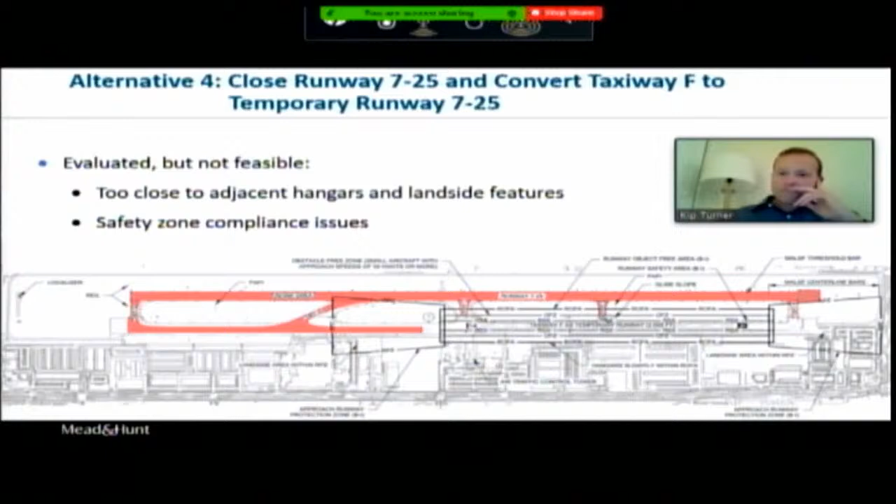Is someone blocking on communication? Okay, should I try to see if they can hear? Kip and Mr. Chairman, can you hear me now or not yet? Still can't hear. Can you guys hear us now? Yes. Yes. Yes. Okay, back on.

Thank you, this is Anna. To respond to your question, Mr. Chairman, we do try to keep our practices consistent with the Board of Supervisors, and a standard procedure they do on receive and file items: they do a motion, a second, and they do vote. And the Camarillo and Oxnard Airport Authority follow suit. So if it's all the same to you, as the chair of the commission, a roll call vote would be preferred, but as the chair, you make that determination.

Okay, well, since I was admonished once before, we might as well go and make everyone happy and do a roll call vote, please. Sounds good.

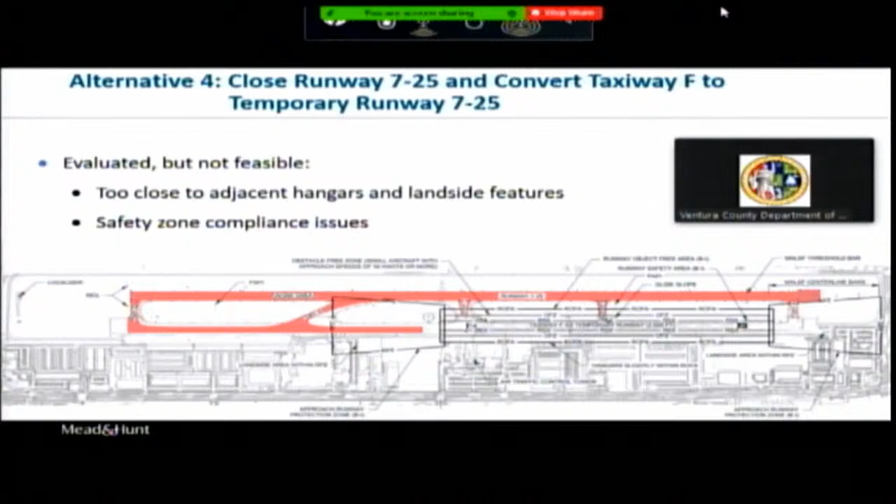Thank you. Robert Trimborn, Aye. Maggie Bird, Yes. Nanette Metz, Yes. James Flickinger, Yes. Adriana Vondergraff, Yes. Bobby Williams, Aye. That motion passes unanimously with one abstention.

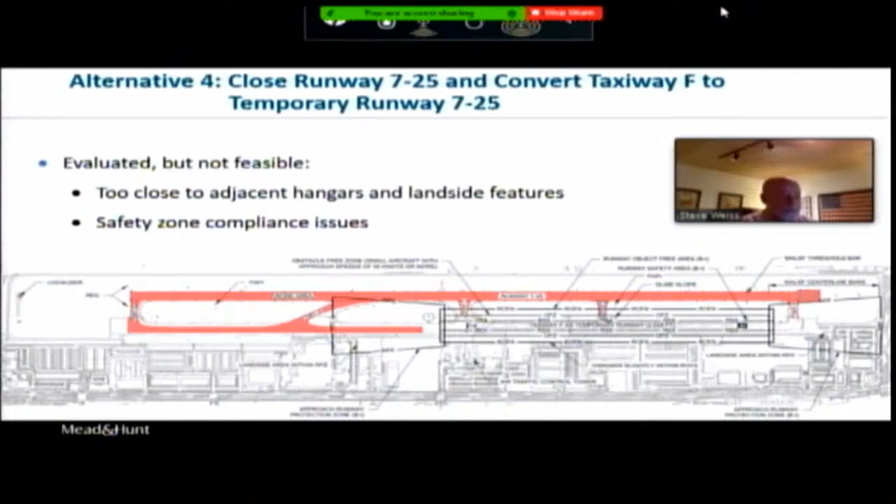Agenda item 6B is to receive and file a summary of the second tenant workshop held on December 7th, 2020 for the Oxnard Airport runway 7-25 taxiway connectors and parallel taxiway pavement reconstruction project. The recommendation of staff is that we receive and file this summary, and we look forward to staff's recap of this tenant workshop.

Thank you, Mr. Chairman. Kip Turner again here, Director. This is the second of three public workshops; we'll have a third and final one probably late January or early February, which will be the last planned workshop, though public comment and participation continues throughout the project. This is a summary and recap of the most recent, second workshop. I'll turn it over to Erin Powers, our project administrator, to go forward from there.

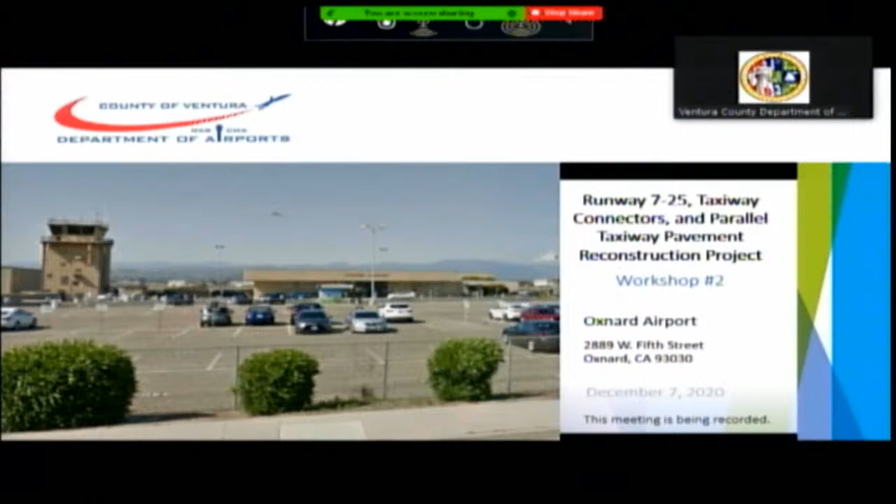We already went through the introductions, but as part of the entire team: the Oxnard Airport, Kip Turner as Director of Airports, Erin Powers as Project Manager. On the design side, Mead and Hunt—I'm the Project Manager, Chuck McCormick, and Jeanette Larrera is with us tonight as the Civil Design Lead. As part of these tenant workshops, we engaged Arellano Associates for public outreach, especially key during this COVID situation where meetings were held virtually.

Next slide please. As a summary from last time, we'll go over the purpose of the project tonight, project overview and description, proposed airfield changes, and the results of the workshop number 1 survey. We'll review the phasing alternatives as they're being narrowed down, and show you the results from workshop number 2 held a few weeks ago, along with questions and comments received. Then we'll list future meetings and contact information, and be available for questions and answers tonight. Next slide, please.

If you can hear me okay, I'll keep going. As part of the project overview, the project consists of pavement reconstruction—reconstructing the runway down to subgrade and bringing it back up to stabilized shoulders. It includes installation of a new under drain system for improved storm drain improvements. The project will also include installation of new runway edge lights and new MALSF light sets—the medium intensity approach lighting system with sequence flashers, the FAA's own system—along with application of new pavement markings and installation of new airfield signs, guidance, and mandatory hold signs.

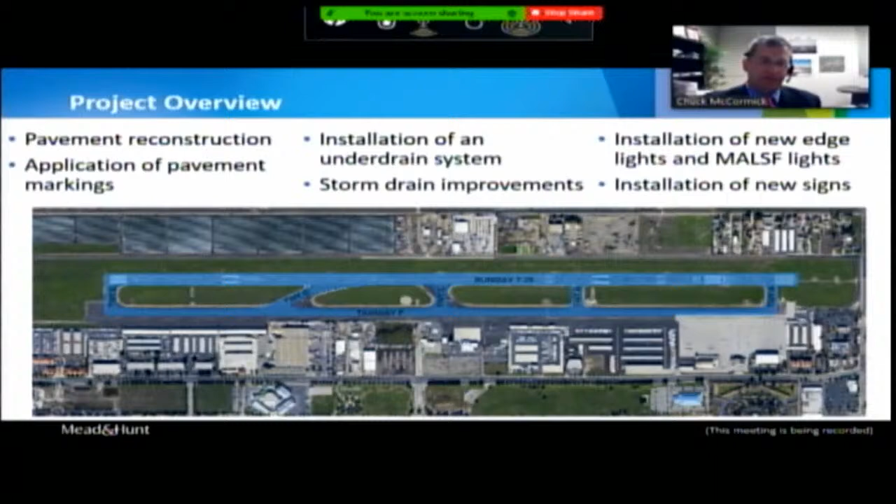This project will be funded with a combination of County of Ventura funds along with a grant from the FAA through an Airport Improvement Program grant. Let's go to the next slide, please.

So the project description: the project will be designed with a single bid package, but it will include a base bid and then up to two bid alternates. The base bid is the primary part of the project, which is the runway 7-25 construction.

The taxiway connectors Alpha, Bravo, Charlie, Delta, and Echo, the reconstruction of those is bid alternate 1. And then the parallel taxiway Foxtrot reconstruction will be bid alternate 2.

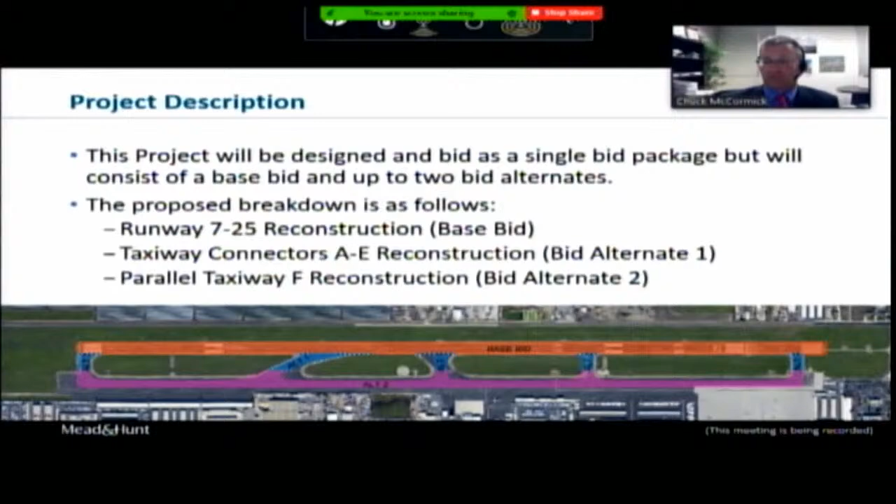Some of the proposed airfield changes are with the taxiway configuration. First, with the high-speed taxiway, you can see the blue line - the new pavement as it would exist if the project is fully funded and completely done, meaning the base bid runway 7-25 along with bid alternates 1 and 2. But these changes are still seeking FAA final approval on the layout of the high-speed taxiway connector. It's got a slight modification to it.

Along with that taxiway would be taxiway Charlie, which gets realigned, as well as taxiway Bravo.

Another change you can see here is the taxiway names. If we do bid alternate 1, the taxiway connectors, the names will change from a single alpha character - Alpha through Echo - to alphanumeric characters: Alpha 1, Alpha 2, Alpha 3, Alpha 4, and Alpha 5. The parallel taxiway would be changed from taxiway Foxtrot to taxiway Alpha. That's the new naming convention as prescribed by the FAA Airport Design Advisory Circular, which is now the standard for FAA design projects.

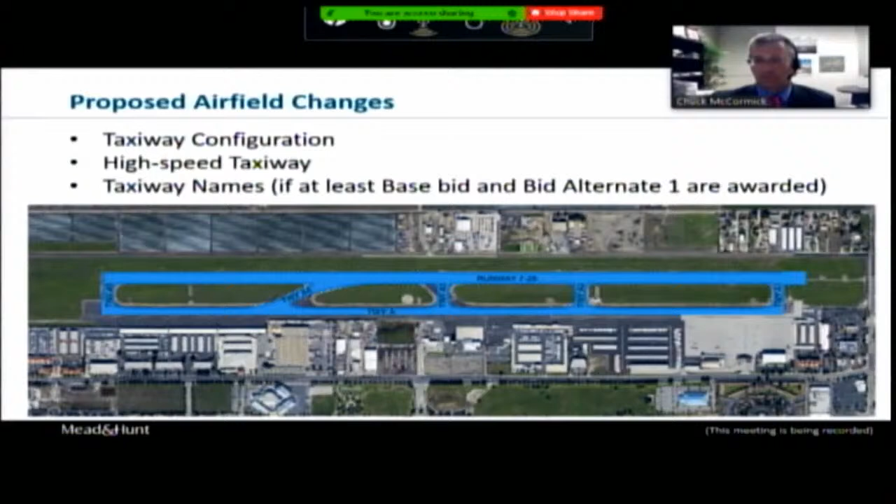From the workshop number 1 survey, we had 2 questions for the airport tenants that were involved. We had 42 respondents, and the question was: what is more important for you - expedited construction duration, meaning let's get the project done as fast as we can, which necessitates completely closing the runway and the connector taxiways and the parallel taxiway?

The second option was: do you prefer limited runway availability? That was alternate 2, which would have runway 7-25 available, albeit in a shorter length. It would be one phase having approximately 2,100 feet available, and the second phase would have approximately 2,500 feet of runway availability. But that project costs more because of the multiple phasing involved, and a longer construction duration - Jeanette will highlight that in a bit.

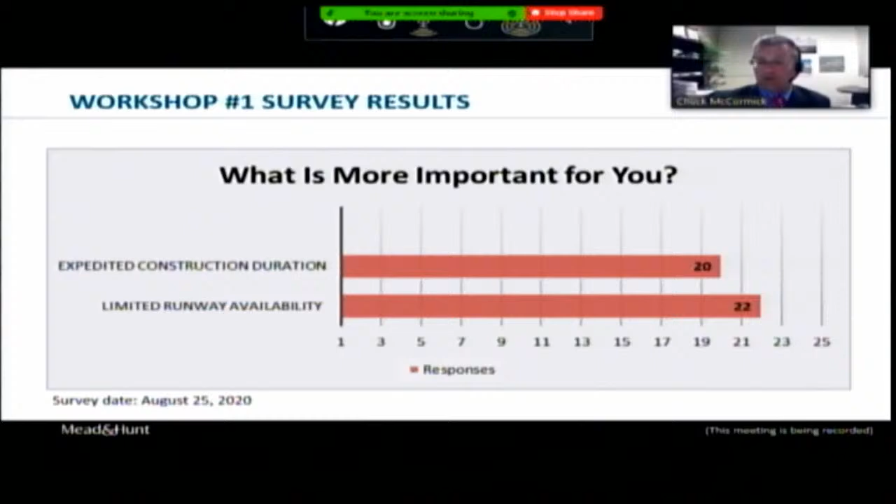Now I'm going to hand this over to Jeanette, and she's going to go over - again, we had 5 alternatives that we investigated as part of the initial design, and from tenant workshop number 1, those have been narrowed down to 2 alternatives. So Jeanette, if you can.

Thank you, Chuck. Are you guys able to hear me okay? Yep, we can hear you. It seems like there's a little delay on my side. But let me know if you guys cannot hear me, and then I can switch to my phone - I have it ready.

So like Chuck mentioned, we analyzed several phasing alternatives, and those were presented at the first workshop. For this second workshop, we narrowed it down to 2 alternatives. The first alternative is the full runway closure with no arrivals or departures. Let's go to the next slide.

For this alternative, runway 7-25 and all the taxiways will be closed. I'll be referencing the taxiways by their current name so there's no confusion. During this construction phasing, there will be no airfield facilities available, since all the navaids, like the PAPIs, the glide slope, localizer - everything will be turned off.

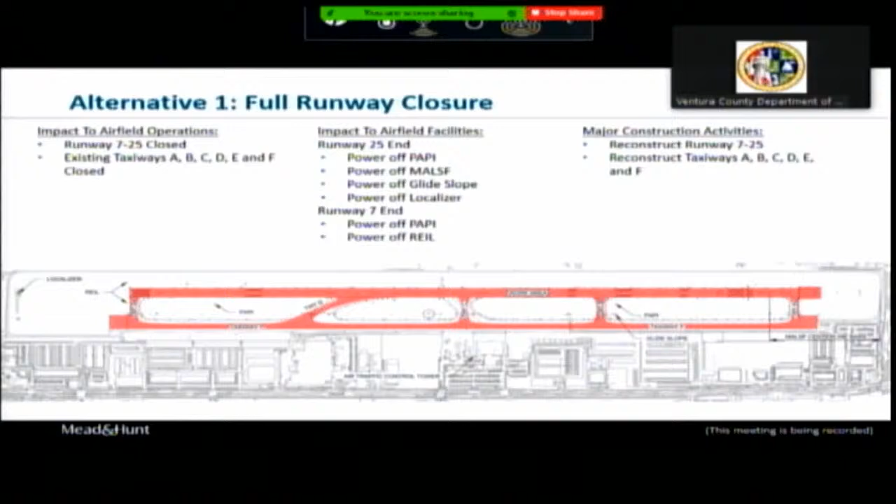If we go to the next slide, please - an analysis was done for each of the alternatives, considering safety, schedule, budget, and product quality. The table here summarizes the evaluation and scoring for the full construction phasing alternative.

Scoring is provided on a scale from 0 to 10. A score of 10 indicates an ideal scenario, and a score of 0 indicates an unacceptable scenario and eliminates the alternative from consideration. In this scenario, there will be increased operations at nearby airports, and also aircraft operations on runway 7-25.

There will be no runway operations. The construction will take approximately 3 to 4 months, plus 2 weeks of additional night closure for grooving and final markings. This alternative provides the most cost-effective construction operations.

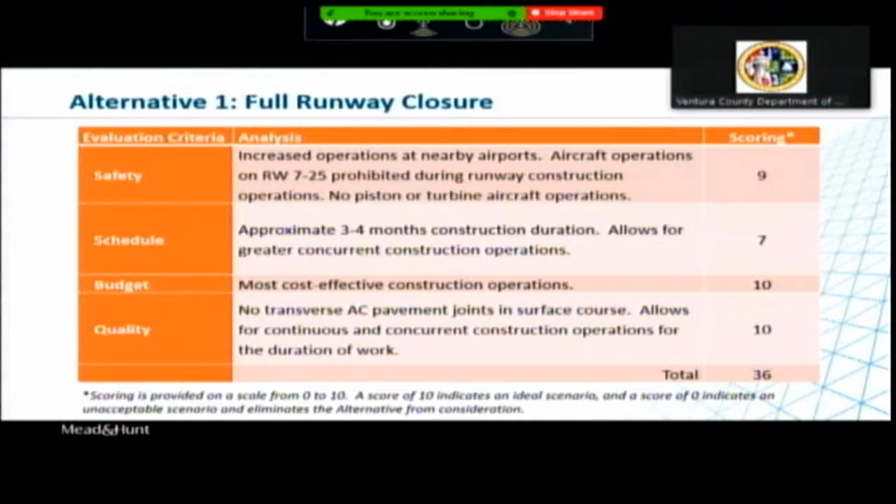Since there will be concurrent operations during that construction, there will be no transverse asphalt pavement joints in the top layer of asphalt, meaning the asphalt train will be able to go from one end of the runway to the other with no stopping or joints in between. So let's go to the next slide.

Alternative 2 looks at having partial runway availability during construction. If we look at the next slide, we can see an exhibit showing how this option will be a 2-phase construction.

Basically, the runway will be split in half. The construction will be on the west end, and taxiway Delta and Echo will be constructed together with the west portion of taxiway Foxtrot. This will allow us to have a runway of approximately 2,500 feet. With this runway, most pistons should be able to operate, and there will be no touch and goes allowed.

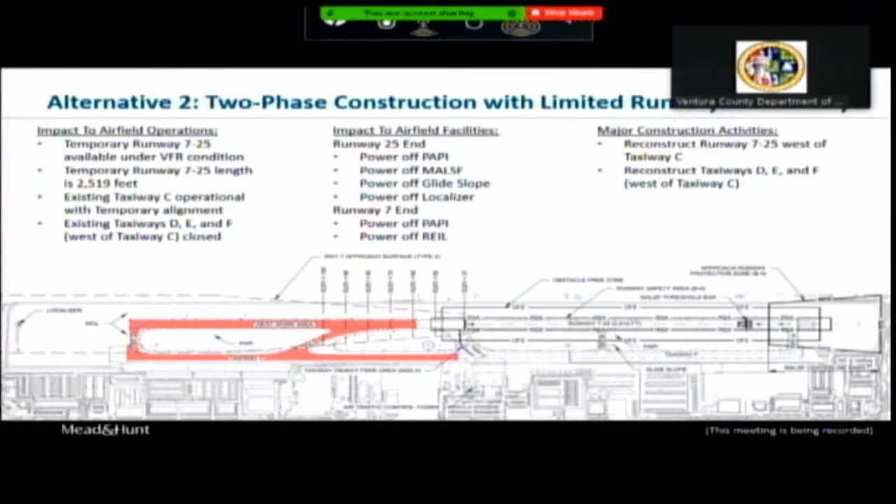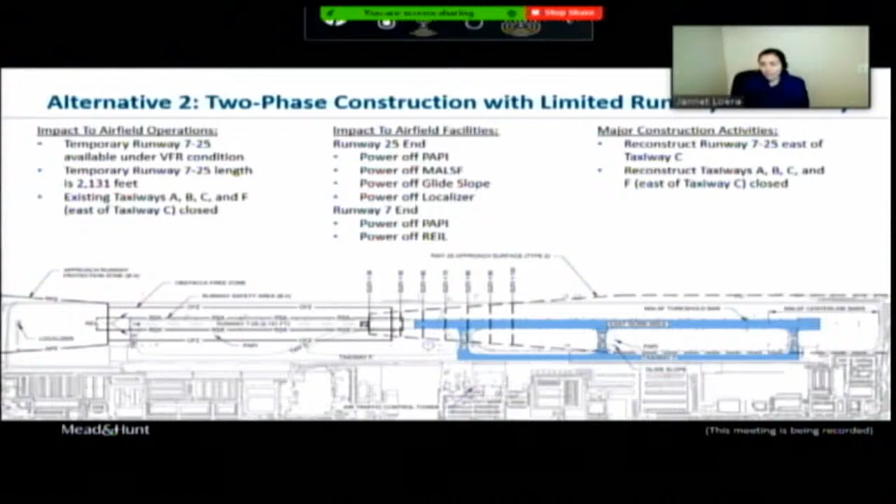If we look at this next slide, this will be the second phase of construction. The east portion of the runway, and taxiway Foxtrot, Alpha, Bravo, and Charlie will be constructed, and a 400-foot buffer will be maintained between the construction equipment and the aircraft approach. This leaves us with a runway length of approximately 2,100 feet.

If we look at the next slide, please. We ran the same evaluation criteria as alternative 1, and the impacts to safety in this configuration include a shortened runway available for small aircraft, a reconfigured runway, and aircraft operations over the construction.

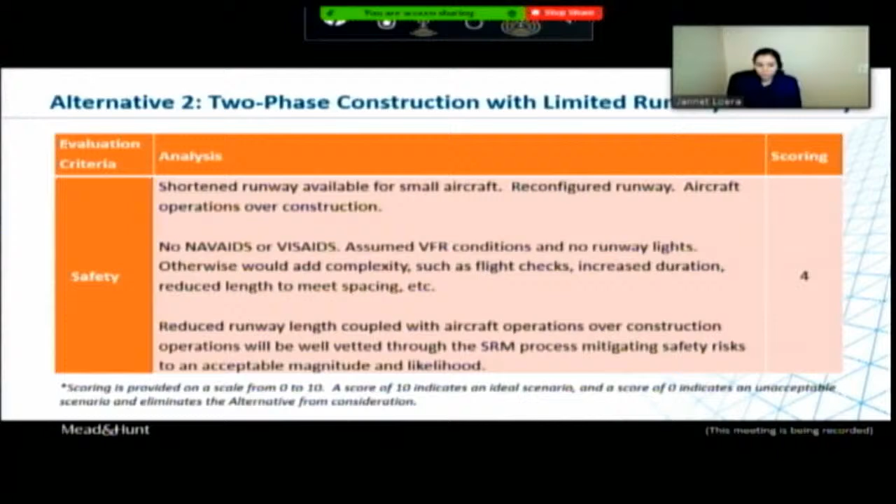Also, there will be no navaids, visaids, or runway lights available, so aircraft will have to operate under VFR conditions. And if we look at the next slide, as far as the schedule...

The construction for this phasing will take approximately 5 to 5.5 months for the main construction, and we'll have to include about 1 to 2 week runway closures to do work where the phases meet. Basically the middle of the runway will have to be closed for about 1 to 2 weeks, up to 3 times, plus 2 weeks of night closure for runway grooving and pavement marking, similar to alternative 1.

Looking at the budget, for alternative 2 there will be reduced construction efficiency, and the durations result in increased cost of approximately $1.2 million. This is money that could be going toward construction of the connectors or the parallel taxiway.

In this alternative, we'll add two runway configurations, so the runway will have to be striped 3 times. First, the existing markings will have to be removed, then the first temporary runway striped, followed by a second temporary runway, and then the paint from the temporary runway removed for the final markings. Pavement markings are usually removed by water blasting, which could damage the pavement.

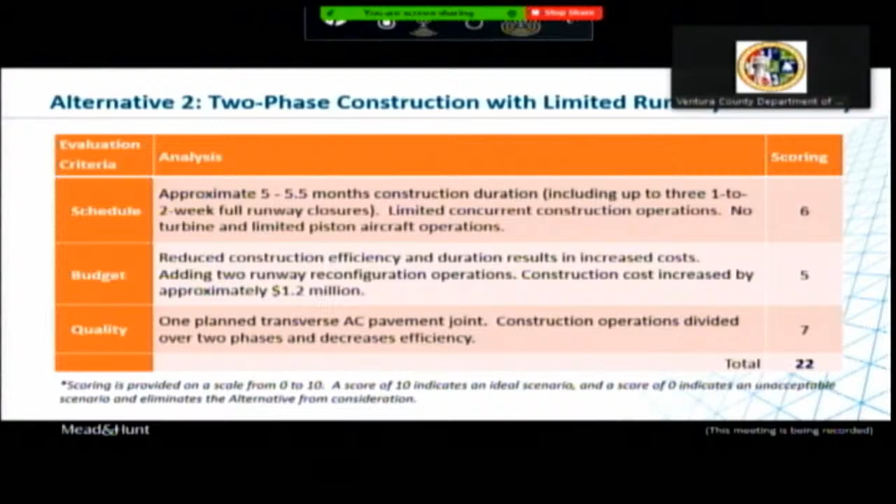Every time we're removing pavement markings, we could be damaging the pavement. The quality of this alternative will be impacted by having construction operations divided over 2 phases, which decreases efficiency, and there will be at least 1 planned transverse AC pavement joint.

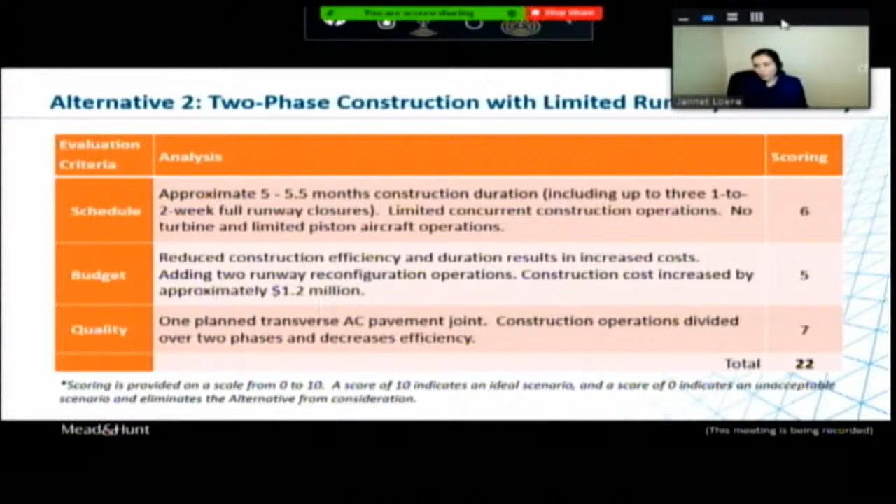Construction is expected to occur in the summer or fall of 2021, subject to FAA funding, and the award of bid for alternative 1 and 2 is also subject to FAA funding. So the ideal scenario will be to build at least the runway at the connector, so that later on, if we're not able to award the parallel taxiway, we don't have to impact the runway and can leave it open for construction of the next project.

As mentioned in the previous slide, alternative 2 increases the cost by approximately $1.2 million, about 30% of the cost to construct the taxiway connectors. Alternative 2 will also require a safety risk management process, because the shortened runway and aircraft operations over the construction activity will have to be approved by FAA, which might impact the start of construction and funding. This could take months to get approved.